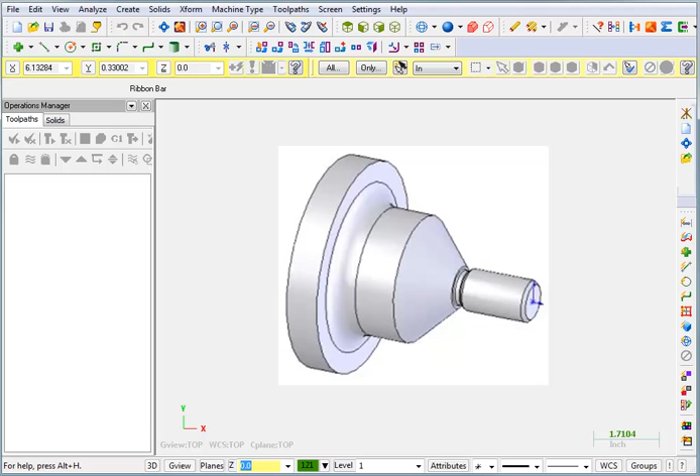For our next series of lessons, we're going to be working on this part here. I generally refer to this as the nose piece. Again, it's similar to the last one we did with a few less steps. It's a 1-inch diameter nose piece. It has a tapered shoulder that moves up here at 135 degrees.

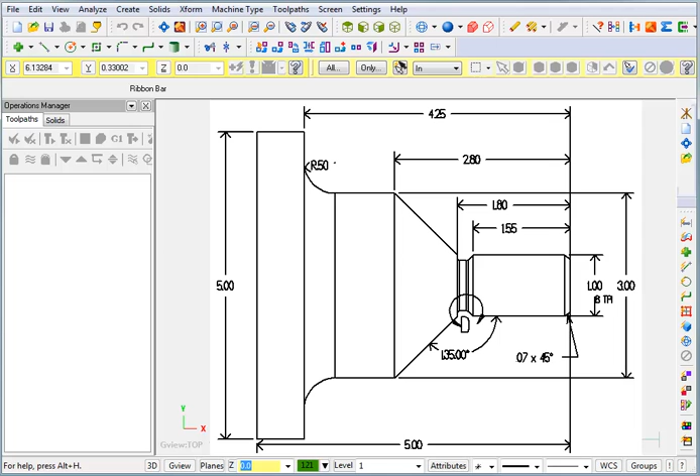Comes up to a diameter of 3 inches. And then that moves over to a shoulder that's at 4 1/4 inches, and there is a 1/2 inch radius blend in that corner. The outside final diameter is 5 inches, and the total length of the part is 5 inches. So that's what we're going to be drawing.

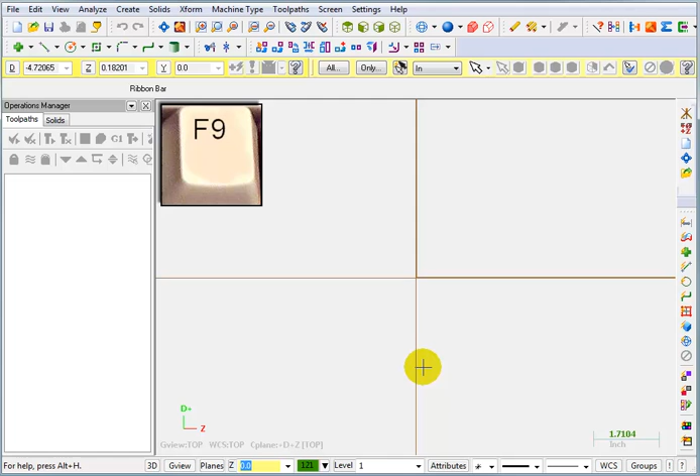If you take a look at the scale factor on our graphics screen, mine is showing 1.7 to the inch, or to whatever that distance is. And right now I'm in an XY view. So I'm going to switch my plane so I'm working in a diameter and a D plus Z plus view. Okay, I'm going to hit function key F9 so I can see where my 0 is. And I'm going to roll my wheel back a little bit, change my scale factor.

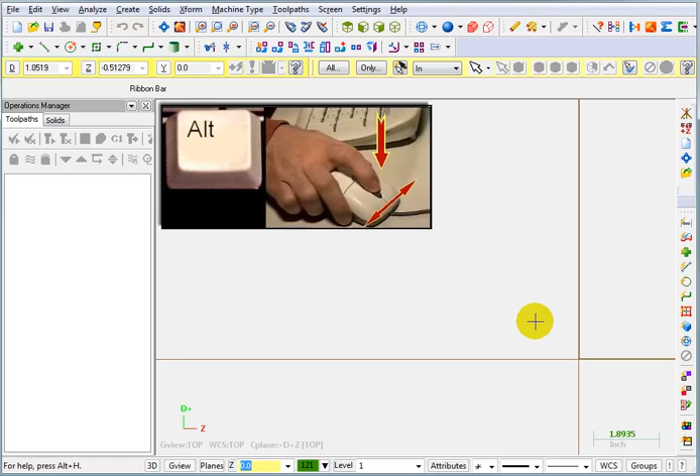And then I want to move my 0 to this lower right corner of my screen. To do that, I can hold down the Alt key on the keyboard and then hold down the wheel on my mouse and then slide my mouse over so I can pan the graphics area over to the side. Okay, and this is where we're going to start drawing from. So again, I'm going to do the vertical and horizontal lines like we did last time.

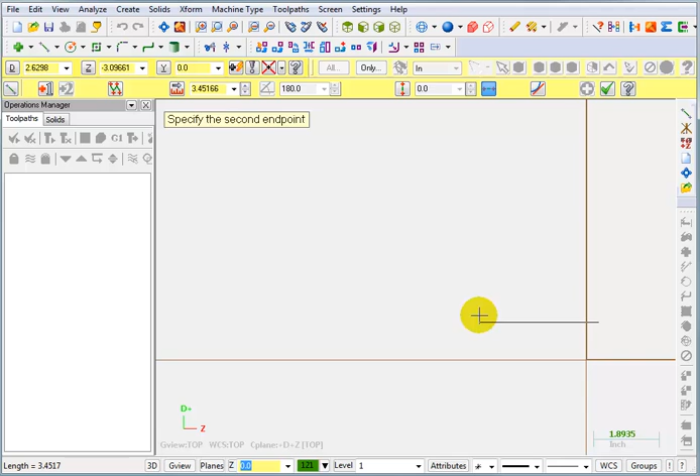So I'm going to go to Create Line Endpoint. I'm going to start with my horizontals. I'm going to sketch a line across here, and I want that to be at a diameter of 1 inch. I want another line across here, and I want that to be at a diameter of 3 inches. And I'm going to do another line out here that'll represent the outside diameter, and that will be at 5 inches. Now that I can get a rough idea of the size of my part, I can roll my wheel a little bit to maybe zoom up on that.

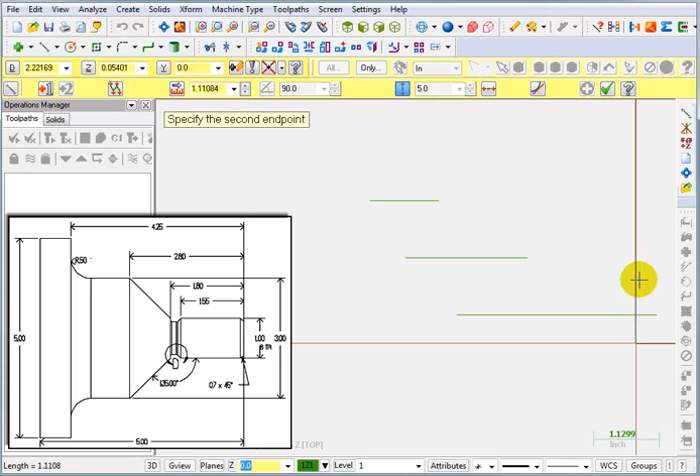Now I'm going to make sure to apply this last line. You can see it's still light blue. It means it's still alive. So I'm going to apply that so it turns green. And I'm going to switch to vertical lines. And I'm going to do one that goes from the origin, and I'm just going to go somewhere past the nose piece. And that's at 0, so I'm just going to hit enter.

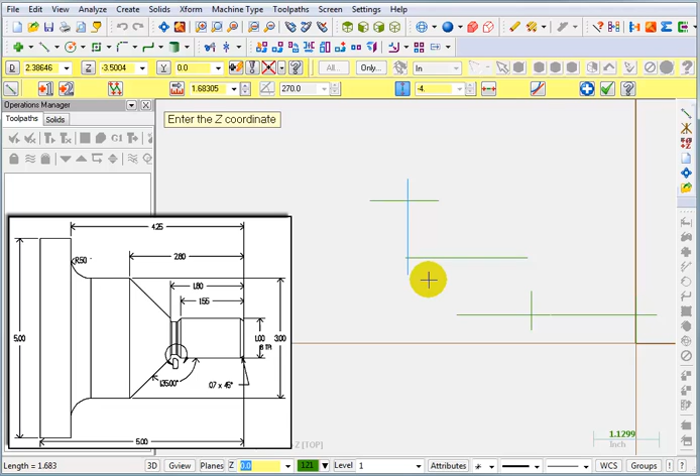And then I'm going to do another line that represents the end of the nose piece, and that is at minus 1.8. And I'm going to do a line back here at the shoulder that is at minus 4.25. And one to represent the back side of the part at minus 5. Okay, and we're going to apply that. And now I want to change my line. What I want to do is create the line that moves up at this angle.

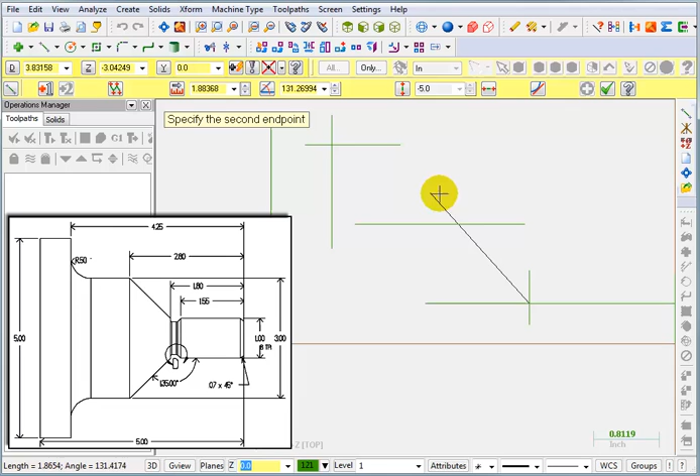So let me zoom up on that a little bit. I'm going to move over here until I'm at the intersection of these two lines. Now make sure you see this little symbol here, because that's showing you that you're at the intersection. If you don't see that, then come up here and select the intersection option. And then pick the two lines so it grabs that intersection. Because I want this line to go from the intersection there, let me turn off vertical, and I want it to come over here somewhere. And again, I'm just going to sketch this somewhere in place.

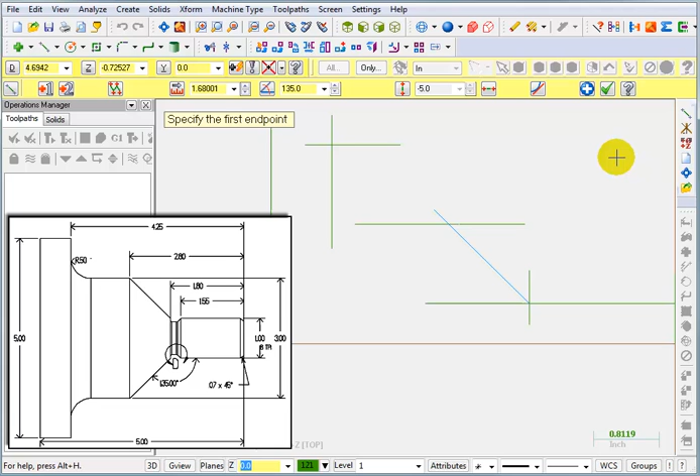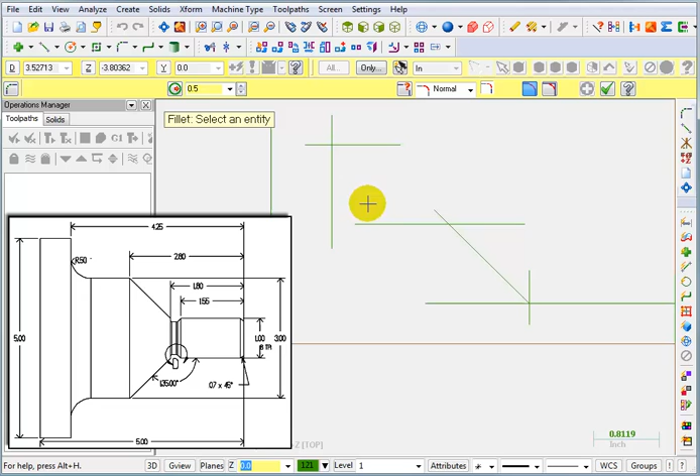And here it shows me the angle. I did 131.26994. Well, according to our print, that's actually supposed to be 135 degrees. So I'll say 135 and hit enter. Okay, so that line is now at the proper angle. I'm going to OK that. And before I start to trim everything together, I'm going to put this little radius in the corner here. So I'm going to go to the fillet command, and I want to put in a radius of a 1/2 inch. And I want it to be between this line and this line.

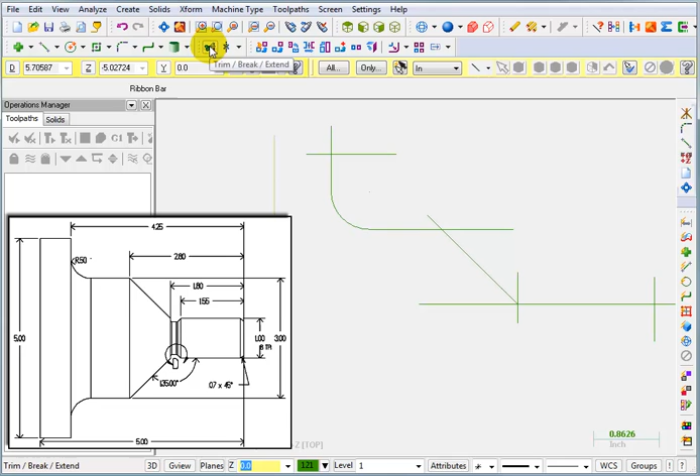And the last thing to do is to trim everything together. Let me OK that fillet. I'm going to hit function key F9 again to turn off my crosshairs so I can see what I'm trimming. And we're going to say trim. And I want to trim this, so I'm going to do one click and then two clicks. So click, click, click. So I trimmed this line to that angled line, and then I'll trim the angled line to this line here. The fillet is already blended.

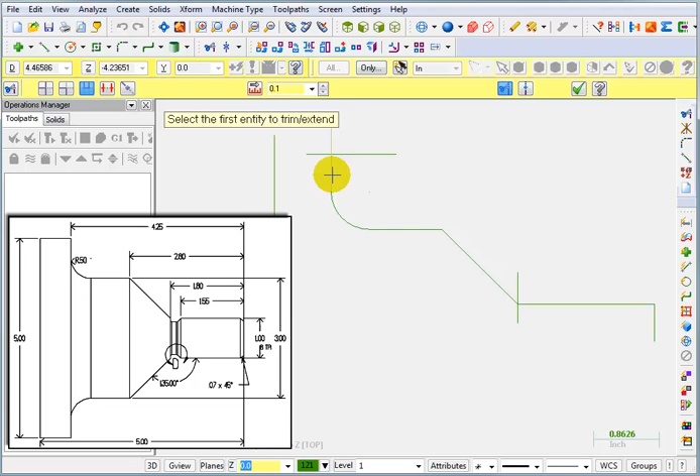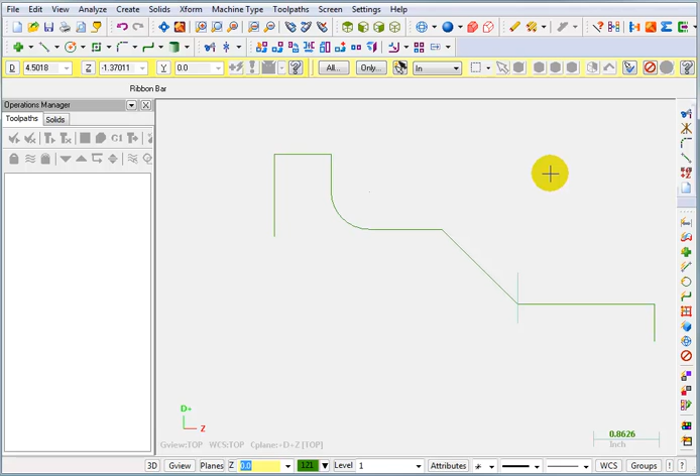For this intersection here, I can do what's called a trim 3. With a trim 3, you want to pick the two outer boundaries first. So I would pick this line and then this line, and I'm trimming those up to this line. And remember, you're always picking the lines that you want to keep, or the side that you want to keep. So that's pretty much our profile. I'm going to OK that. I'm going to select this line and then just hit delete on my keyboard, or you can pick delete off the toolbar up here.